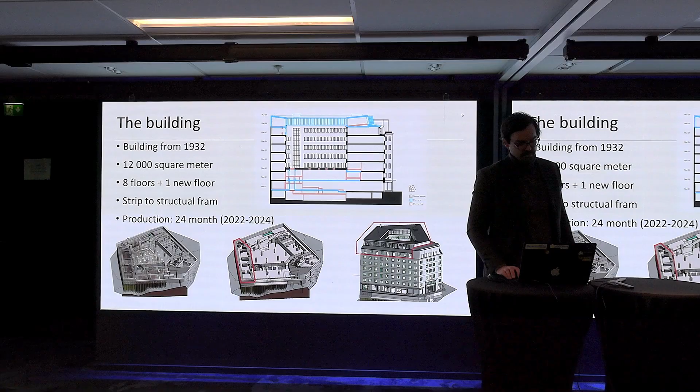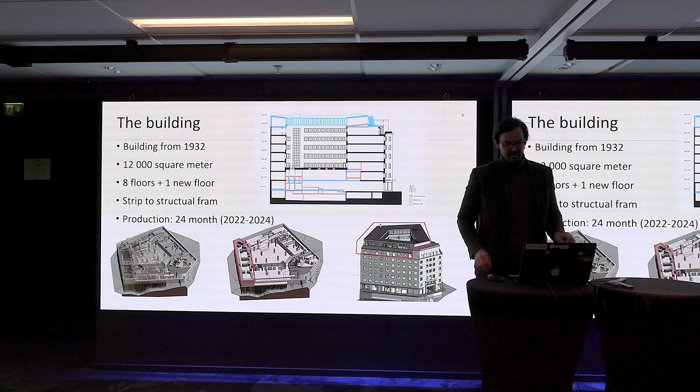And the production is finished. It's a finished product. The tenant moved in last summer. So we have all the results and everything is done in this project.

So I had a little fun with Johannes Ris from TCAB some time ago. He wanted to test his FPV. Oh, I didn't know there was some music here.

So he wanted to test his FPV drone inside our construction. So there is Johan controlling the drone. Here we have torn down the top floor and started to add the new one. And there's me guiding him through the window. So you can see we have completely removed everything inside, all the installations. Some parts of the structure we had to replace as well, so we had to demolish big holes through the whole building in some places.

And inside you see we have completely removed a lot of the floors to refit them to be more suitable for office. There were a lot of levels before. So we've done a lot of demolition inside here. So we need to add a lot of material, and there are a lot of old structures that we need to connect to.

But still, we have done this as a total BIM project. So we still have the 3D model as our legal construction contractual document. So even though we have a lot of existing structures and a lot of unknown and weird things in this building, we still have the mindset that we use the 3D model as our contract document.

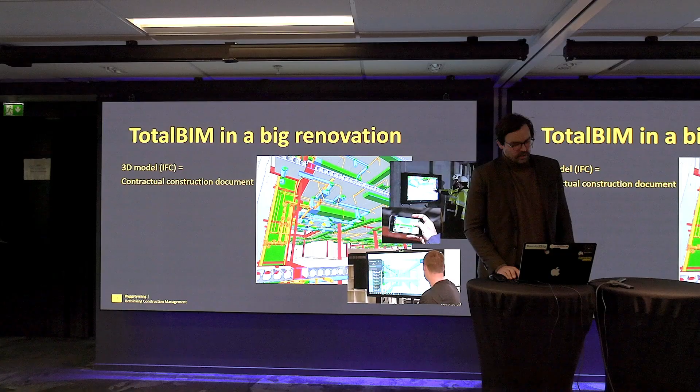And I added a slide here because we talked a lot about mindset and how we should support this way of working, and I think that is something I can really speak to. I love to take pictures of people on site when they are engaging in discussion and helping each other. So here we see Kalle and the electrical guy. He holds his iPad, and they are discussing something that he cannot fit there.

And Kalle is like, "But you have this tolerance. You can absolutely put that there, because with Total BIM we put in so much detail. We narrow things down, and if we make it work in the model, then it should work in reality." But they are not used to this high level of tolerance when they are installing things, so they want to cheat, like, no, that cannot be done. And you see here, Sebastian is also out there helping people, asking and answering questions.

And that's a big thing about using digital tools, especially the 3D model and digitalizing all the administrative work on a construction site: the supervisors, the site managers, everybody can spend more time on site helping the production, because they can manage everything they need to do through their phones. They can do everything from their phone on StreamBIM.

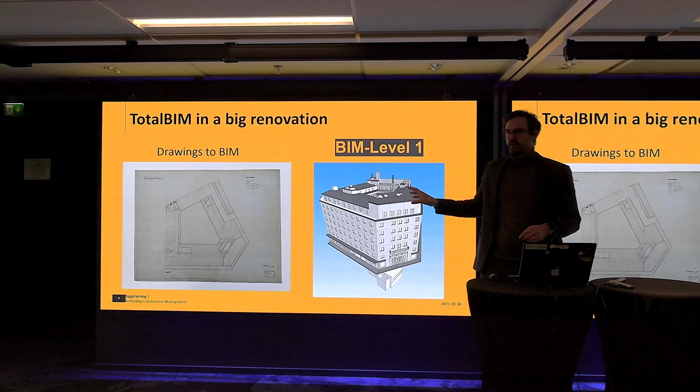So how do we do Total BIM in a big renovation? I will come to the digital rebar in a minute, but I need to explain how we managed to have the 3D model at this stage. When we got the project, we made a simple BIM model from the old drawings from the 30s, because we couldn't access the building, it was still rented out. Then we got to level 2 when we got access to the site, the building. We laser scanned everything, and then we could enhance the model even more.

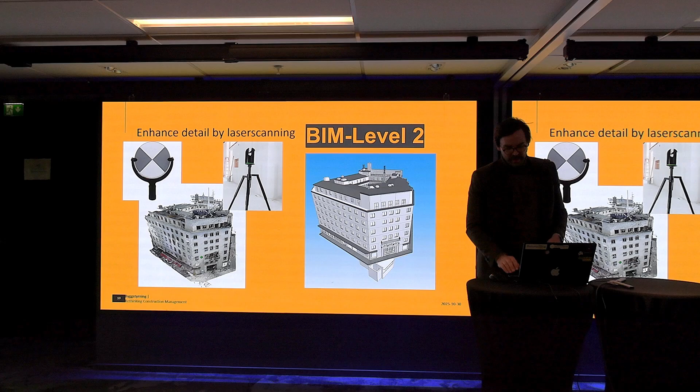And then when we started to demolish things, we figured things out. We go to BIM level 3 when we really need the details, when we need very good precision in some part. Then we laser scan it and put it in Immerso to really see what we have modeled and see if we could fix anything.

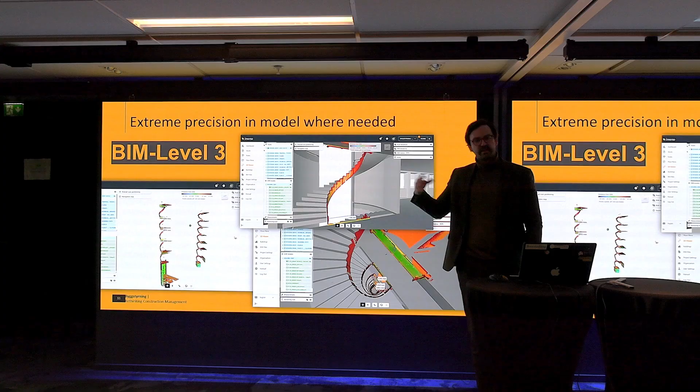This is from an old elevator shaft that is 100 years old, and we're going to put a new elevator there because there's new regulations, but we cannot do anything with the existing stair. So we needed to know exactly how big that elevator could be to fit there, so we needed extreme precision in some part of the building. We added that later on when we could access that area and demolish the old elevator, and the engineers could enhance the precision in that part.

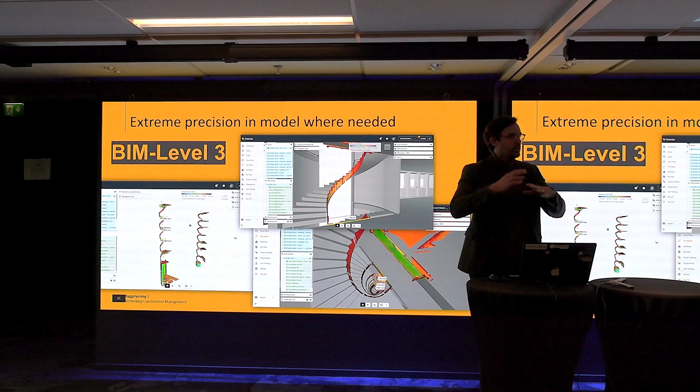And that we did throughout the project where we needed, when we got access to different parts. So we constantly had a laser scanner available to do this kind of work throughout the project.

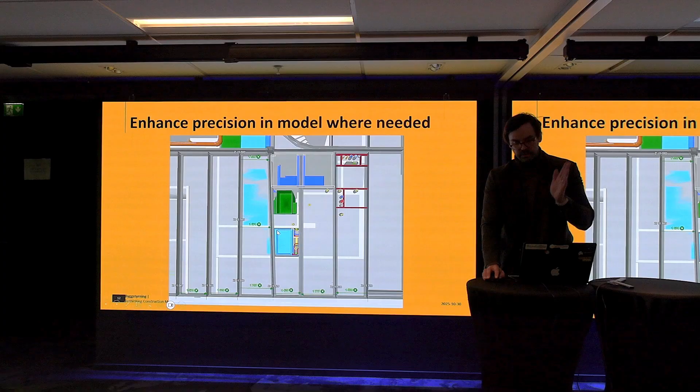We also discovered things like this - you see this steel beam, old steel beam. Usually in the drawings they were like CC 150 everywhere, but in reality it was 150 here and 180 down here, so it was really weird. And we were going to take up a new shaft here to install all the new systems, so we knew we had to know the locations of all the beams quickly.

So quickly when we got access to the site, we could start investigating things like this and discover this, and we can move all the installations a bit instead of discovering this when we actually were there taking up that hole. To really investigate through and enhance the model to find things early, we did a lot to not stop the production - find problems ahead of time.

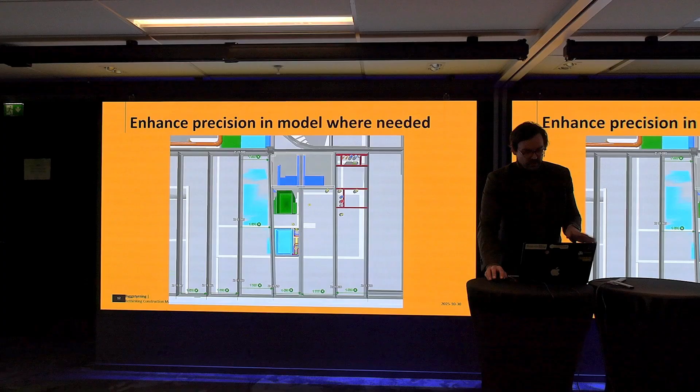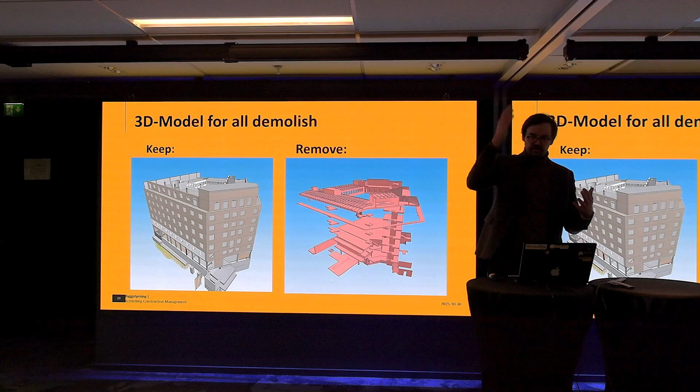And then we had Total BIM for the demolition part as well. So we 3D modeled the whole structure, including all the roof trusses, so we could have the demolition company also have a contractual IFC model showing what you are going to demolish. We could get extremely good quantities from this, and it was clear for them when they were outside demolishing things. They had an iPad that showed you're going to cut this wall here and this is going to be removed, and we could control the demolition very precisely by having that also in the model.

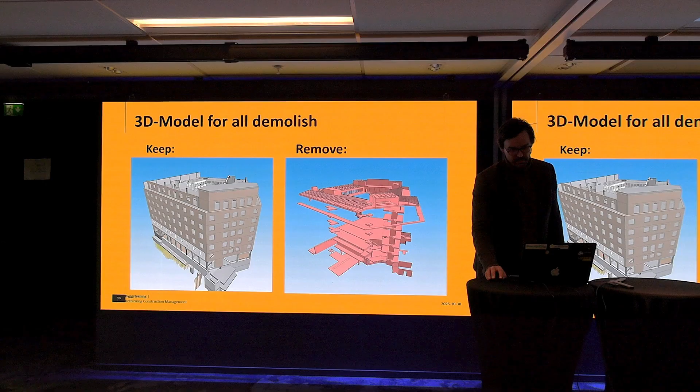So it was a pretty rough environment during some time, because we demolished a lot and we needed to add new structure as we demolished, because we were removing support structures. We needed to add temporary support structures. So it was a lot of building and demolishing at the same time, but we still managed to keep a really good environment inside, and this was all planned, so we could really go on in a nice way. It was not like panic at any time, because everything we had planned ahead of time.

Yeah, so now to the rebar and how we managed to do 3D rebar without drawings in a project where there is so much uncertainty and new things. It's not a new development. It's not like you're putting up a wall on a green field.

So I'm also going to do a little live demo. But before I do that, I want to explain the basics of how we got on this.

To be able to do this, like Johan also was talking about, we need to be able on site to filter out what we want to see, because there are a lot of different things you want to view. So we had a lot of talks with the concrete workers and the supervisor Patrick about what they need on site to be able to build this only from the 3D model. Then Victor, the engineer, put together a parameter set for rebar, where we collected all the important rebar properties that were needed so they could filter this on site.

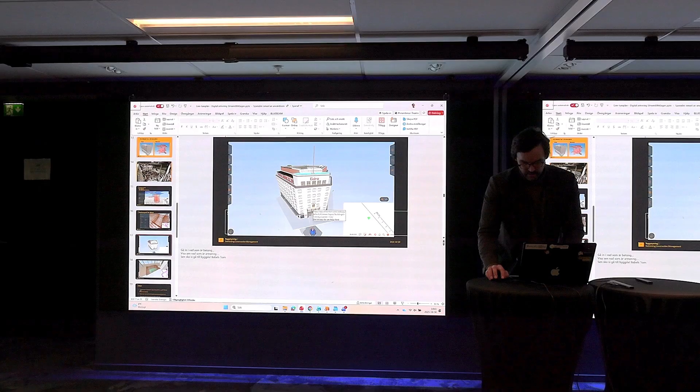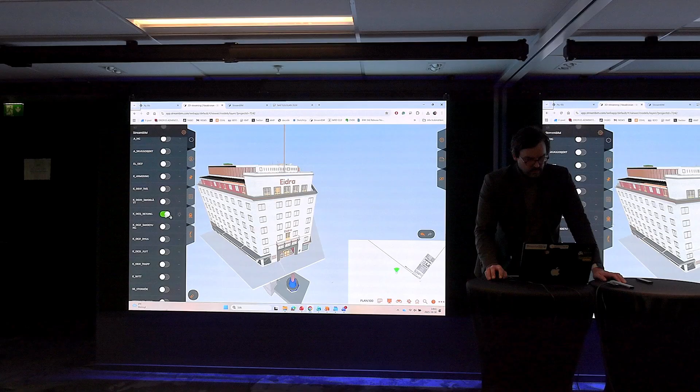Yeah, okay, so this is the building, and we're gonna show you all these horrible layers. And if I only look at all the concrete work, we have this much concrete work that is going to be done in the buildings.

So it's mainly down here we needed to add new floors. The other floors we built in wood instead because it has lower CO2. But this floor was not possible to have wood on.

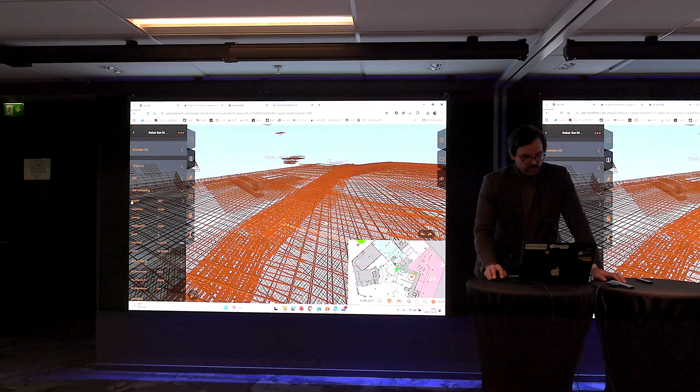And if I turn on the rebar, we have a lot of rebar as well in all this concrete. And if I click on a rebar and now filter on one of the key parameters that were needed, like proper construction part.

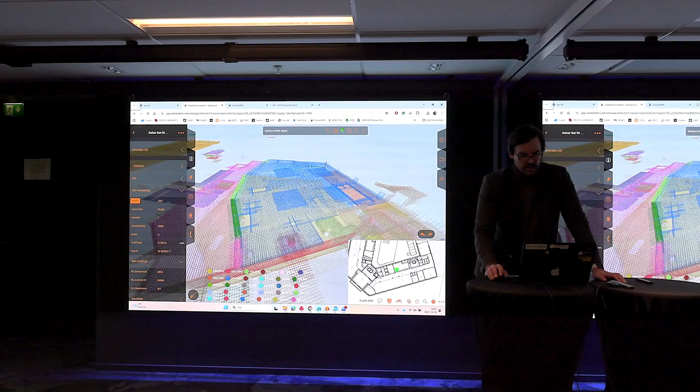So the engineers coded the different parts, or maybe I should color on it instead. So now all these different colors are different construction parts. We divided all the structures into different parts that they were going to build in sequence, so they can focus on only this beam, and this beam, and this beam, and so on.

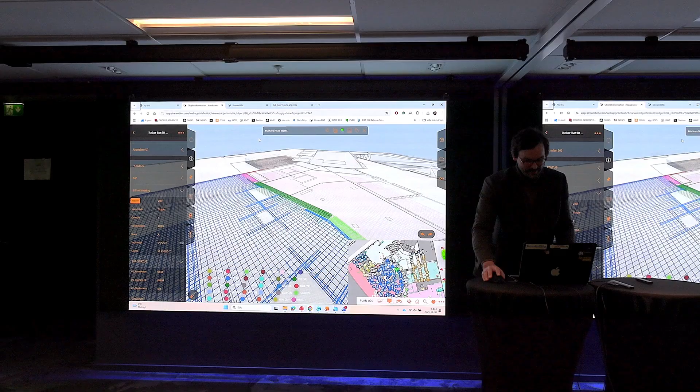So we could filter out exactly for that building part, narrow it down. So I'm going to show you an example of that here.

So the way we approached this was to show that first we have the concrete foreman who was sitting and planning all the works. He created a work order - there was a topic in StreamBIM that now we're going to build this building, this beam, or this to the floor slab.

Then he created a topic in StreamBIM, added that as a work order in their folder, and then he created a material takeoff, or a list of material that we needed to order, and planned the work with the workers. Then the workers could just go out on site, take up their phone, go to that topic, and start work from that, and then add information about progress in that topic in the form of photos and so on.

And the engineers also had access to this work order, so they could follow the work and answer questions from the workers inside that topic.

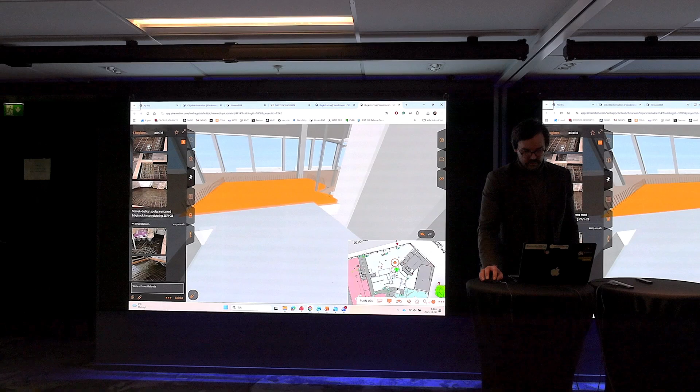So what they usually do is just make a section and measure on their phones on site how high we need to build a form. So that's the first thing they check and do, and they can measure this on site. They don't need any more information like this to build a form for this slab.

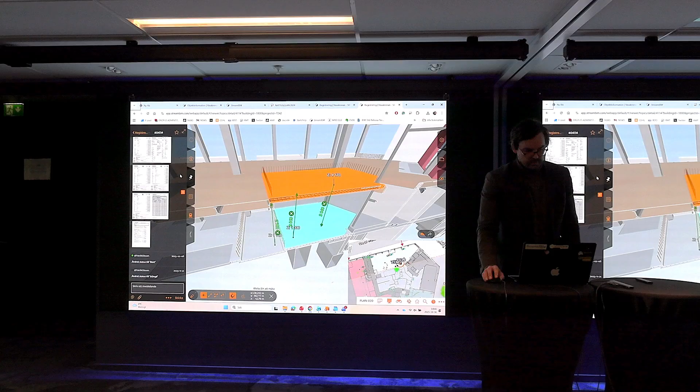So after they built the form, Patrick, the supervisor, orders all the rebar, and all the rebar comes from a specification from the model.

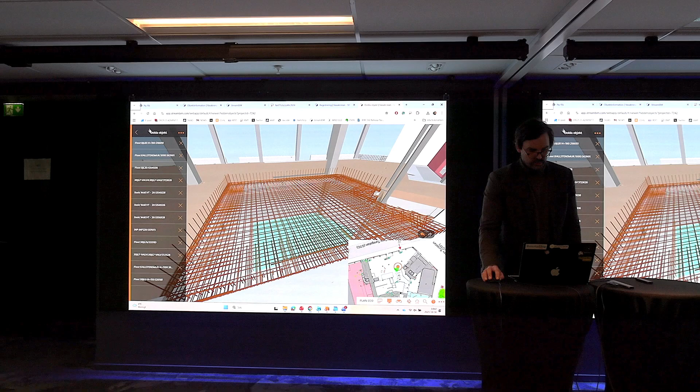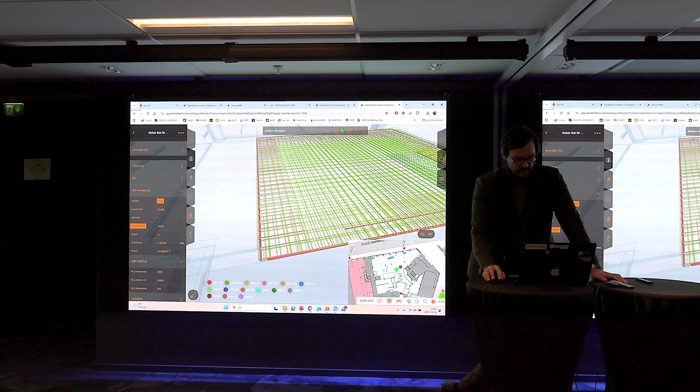So we have all the rebar here. If I click on one rebar in this building part and filter on this construction part, it now filters all the rebar in just this building part. I can also filter on schedule mark. I'm not a concrete engineer, but this is the different types of rebar there is, so they can have them colored and see how many of each type there is.

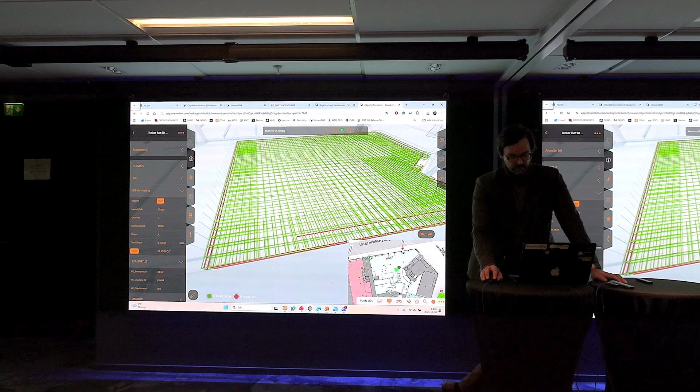They can also control if we have rebar with different sizes. We see that we have one 10 millimeter, we have mostly 10 millimeters, and then we have 16 millimeters around here. So they can themselves filter by color and understand what they are going to do.

From the model, the structural engineer creates a rebar specification, so the rebar is ordered, and we have the list of the rebar put here. Then basically they just start work and create photos along the way on specific areas they want to highlight, adding pictures to show how the progress is doing.

And some information about what the next step is, and some photos. Then they pour the concrete here, and they add all the different recipes of the concrete mix that came to the site. They get a recipe for that, and they put that in the same work order here, with a quality checklist.

We can do this digitally in StreamBIM as well, but they wanted just a simple checklist like this. So we have all the information here about how they did it.

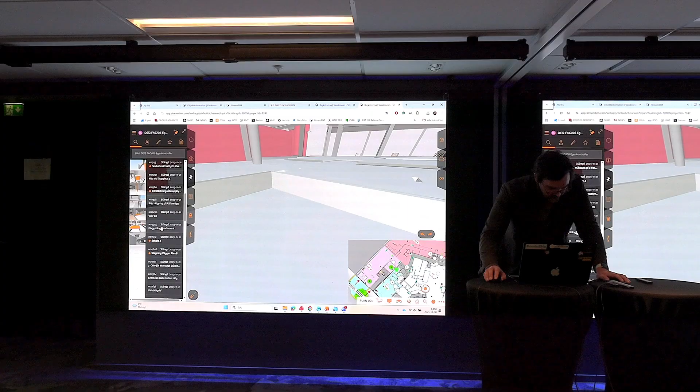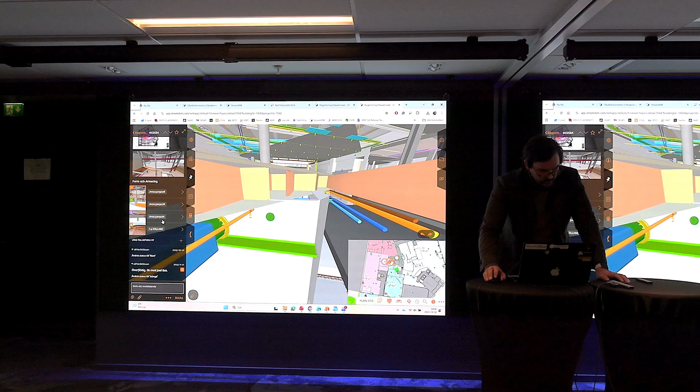Let me see if I manage to find that. I think we have some in these... oh no, there was a beam, it should be the beam. Yeah, so we just have a lot of work orders, different sorts of things. Okay, maybe I have it linked to the PowerPoint.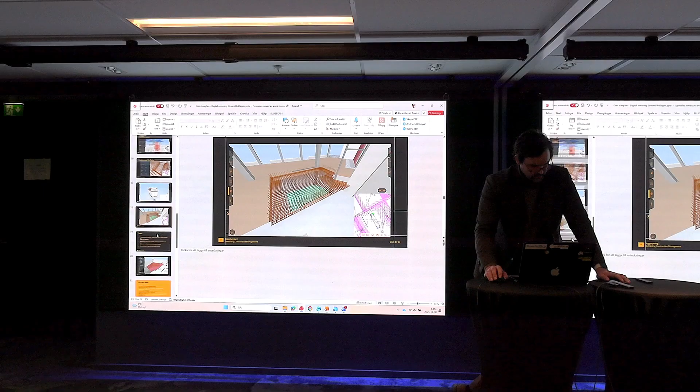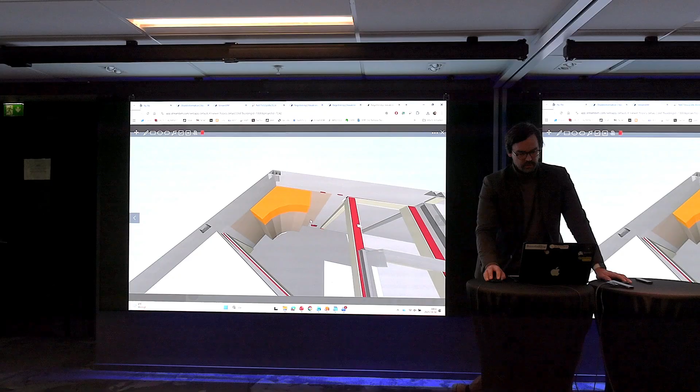But even the smaller parts, in the building there was a lot of removing old brickwork and replacing it, and we needed to pour concrete here over some old structural thing that came up during the demolishing.

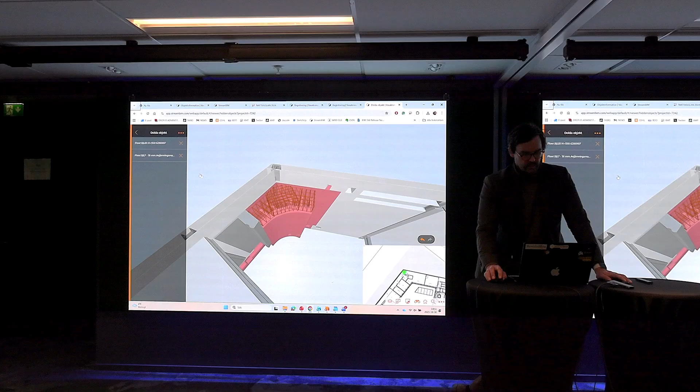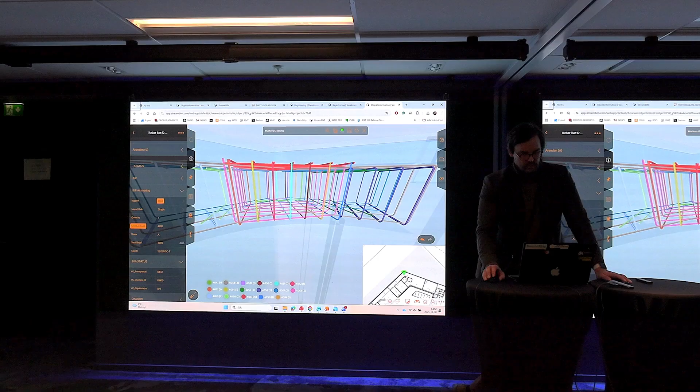So here it's also important where we put all the rebar in the right place. We can do the same thing for this building part, we can filter it out, we can see what kind of rebar we have, and it's easy for the concrete workers to actually build from this. The same thing here.

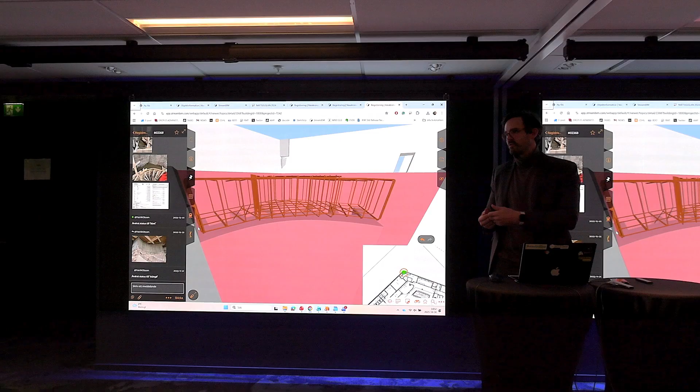They documented with photos, and this is the result. So it was more like, here we need some concrete work, create 3D rebar, educate the construction crew on how to use StreamBIM, educate the supervisor how to use StreamBIM to create this work order thing through topics, and off they go.

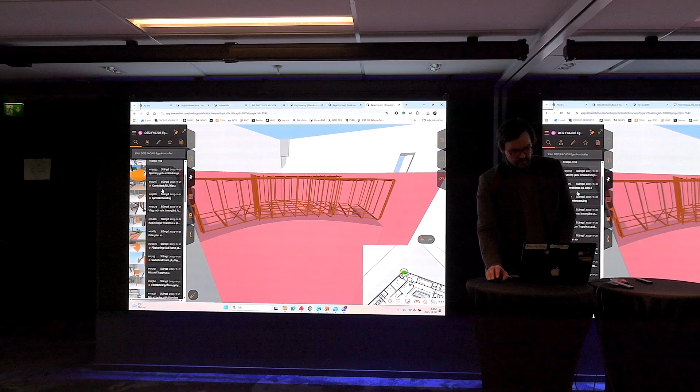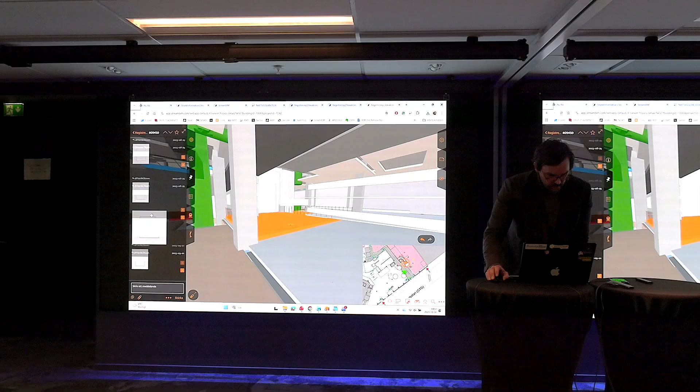So we had, as I said, we had some... I need to find it, must be in this one. But I wanted to show you if anybody here has a good idea how to solve this. Sometimes we need to explain things anyway, and in this work order we can create very simple illustrations on how to solve things that occur.

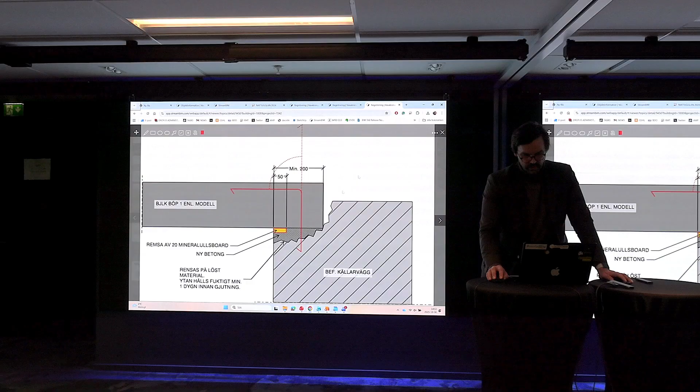So this is something that happened, like they discover something, can we do something else? Then the engineers and everybody can be involved and quickly find a solution so they can move forward.

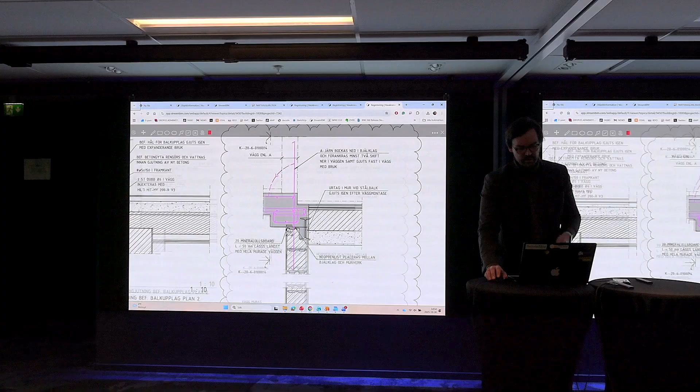And this is an example of not a rebar drawing, but more an instruction to the concrete crew on how to go on in certain details, because maybe this is hard to explain in a 3D model, all these details, how they're going to put some special material here and do something there, and also all this rebar that needs to be in two steps that are going to be bent down in the next step.

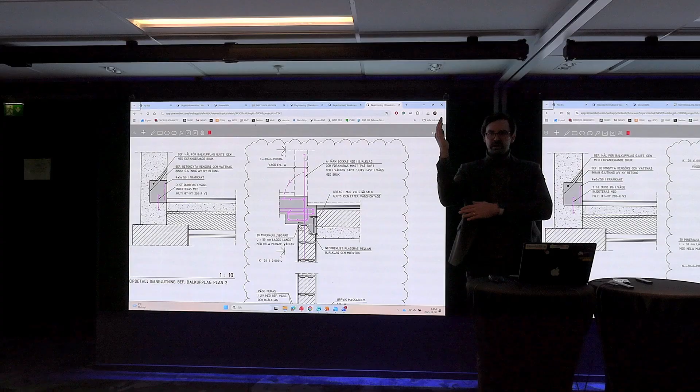How do you 3D model that? Then you need one that is like that and one like this. How do you explain that they're going to do that? We have not figured that out, so that is something we needed to show like this. But there are no measurements here or anything, it's just explaining the steps on how to go on with a certain situation.

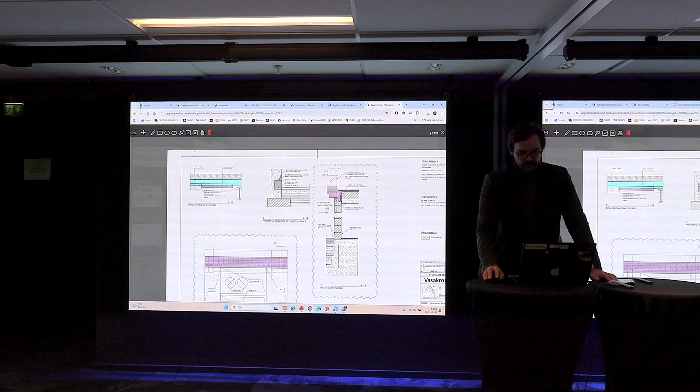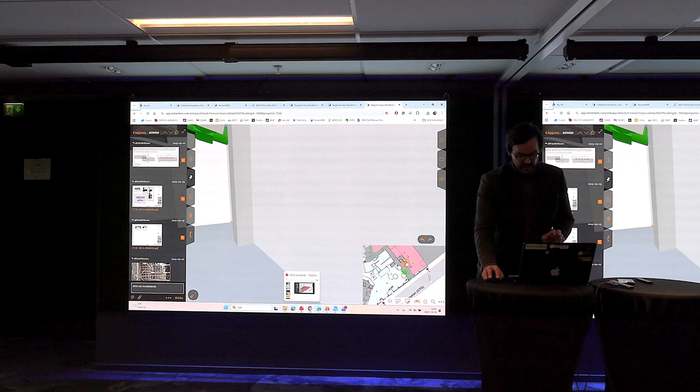But our engineer Victor, he really wants to get rid of these as well, because he really hates doing rebar drawings, but he loves doing them in 3D. So when I talked to them after the project, I asked Victor if he was happy with the way they worked, and if it were up to his engineering company, they have all this internal structural process for how to deliver rebar and stuff. But Victor was certain after this project that it saved a lot of time for the engineers by not creating rebar drawings for all this.

And as I said, he wanted to push it even further. This was 2022, and he believes that you can do even more advanced 3D modeling stuff. Maybe we can animate an IFC rebar.

And we didn't start with this building part structure, we added that later on. So that was his point, he really wanted to emphasize that if you're going to do this, try to break down the elephant into smaller parts and focus on building parts, and create work packages around building parts.

And Patrick, the concrete supervisor, he was a bit skeptical in the beginning, so he almost had to learn to ride that bike with the steering wheel at the wrong side. But he also started to really like this way of working, because he could document everything more efficiently. It was less administrative work for him, and he could do quantities and find issues early on.

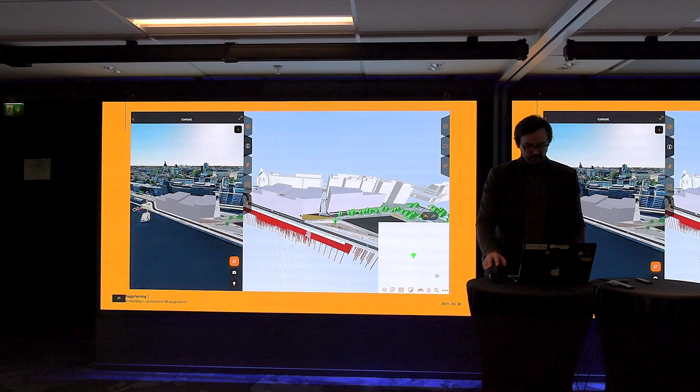And the client and the architect wanted to know how the building would look in the context of Stockholm, and from the boardroom, what view would you have. And you can do that in a lot of complicated visualization software, but we threw that engine into StreamBIM, so you can actually navigate in real world context and look out from windows and see within StreamBIM. That was something fun.